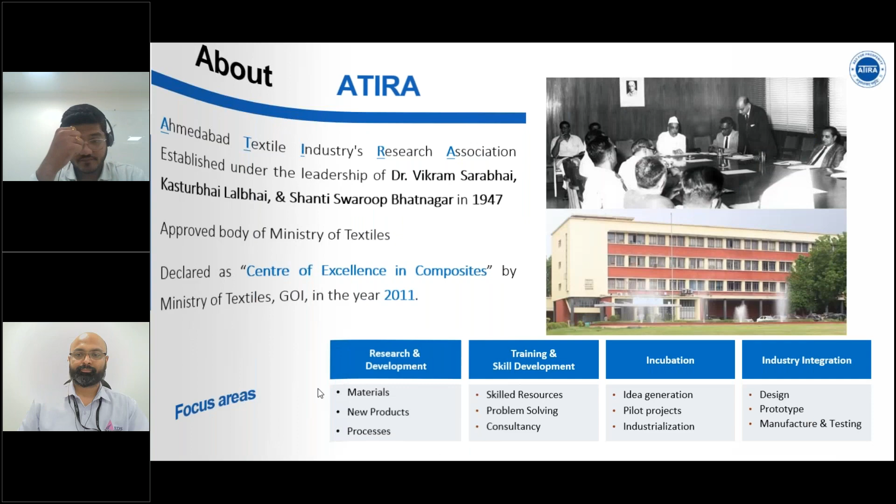So good afternoon to all, and welcome to all on this webinar on the design and simulation for the composite industries. So first, I'm just starting from here.

So basically, ATIRA, Ahmedabad Textile Industry Research Association, was established in the year 1947 by Dr. Vikram Sarabhai, Kasturbhai Lalbhai, and Shanti Swaroop Bhatnagar. And we have been declared as a Center of Excellence for Composites in the year 2011 by the Ministry of Textiles. We are working in different domains and focus areas, where the R&D, research and development in the field of composites, skill development, incubation, and industry integration.

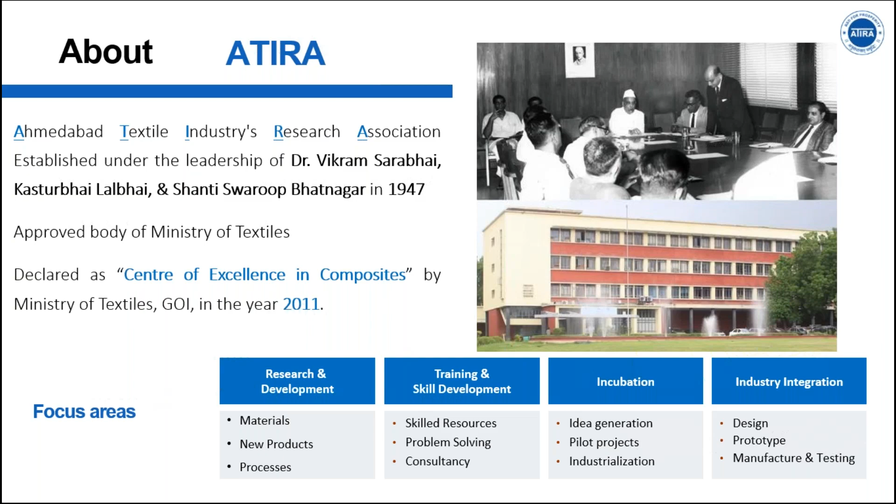Now our today's topic is focusing on composite materials, or the role of design and simulation in the composite industry. So, as you all know, what is the basic fundamental of composite? So when two materials which are distinct in physical property, or which are completely different properties, are combined, two or more materials making a single material, that will be considered as a composite material, where we are getting the combined property of these constituents.

There are so many examples of composites. Some of the common examples are already mentioned over here. Like fiber reinforced composite, ceramic composite, or the flesh in your leg reinforced with the bones, or like RCC structure. So these are the basic examples of composite materials.

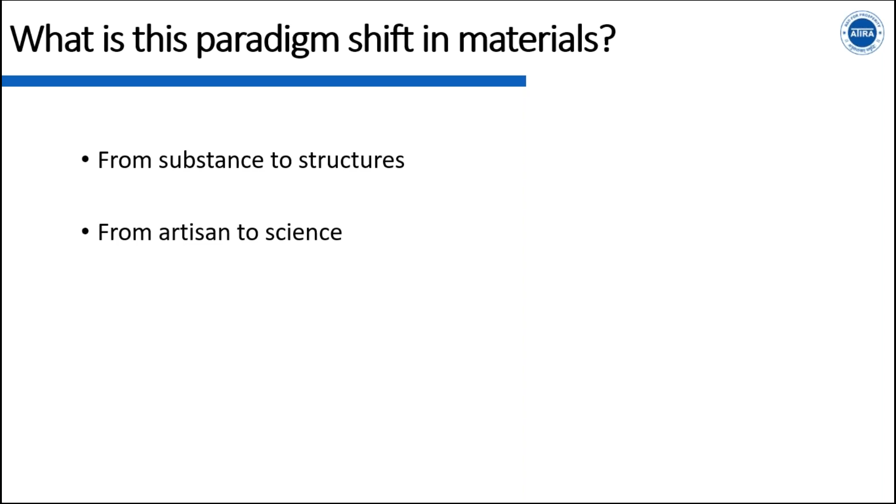Once we are talking about the design and simulation, there is something more important than any new application: the new material conception. The world is shifting towards a new paradigm about material, moving from substance to structure, from artisan to science, from workshop to mathematical modeling, where design and simulation play a wide role, and from what nature provided to what man can accomplish. These are the main parameters where composite material is shifting.

There are so many applications of composite material. Some of the common composite applications and segments are aerospace, transportation, wind energy, construction, pipe and tank, electrical and electronics, consumer goods, and marine. These are the major application areas where composite has been used instead of conventional material.

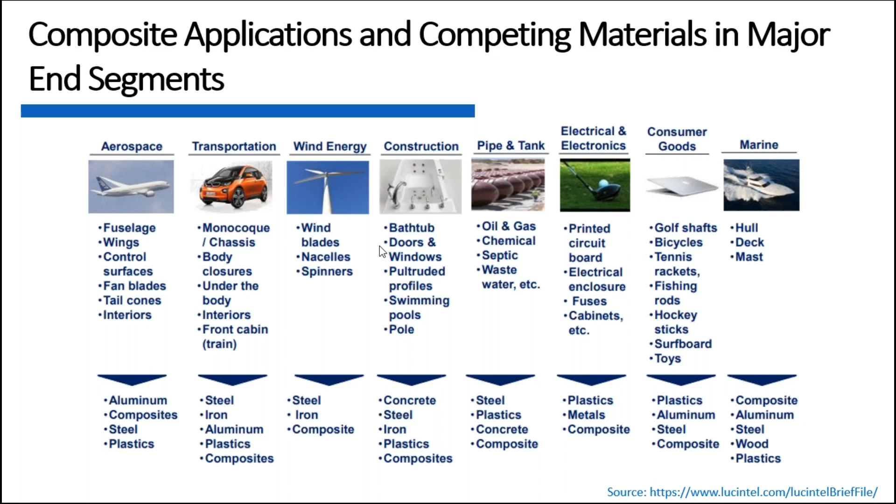The composite market in India is increasing, where new possibilities are there, and design and simulation play a pivotal role in the composite sector.

If we talk about common manufacturing processes, there are many composite manufacturing processes, but these are the very commonly used ones in industries: hand layup process, RTM, vacuum infusion, pultrusion, and compression molding. Subsequently, the benefit or which particular method can be used for development of composite material is mentioned.

Hand layup is suitable for large and complex shapes, and is low cost. RTM is suitable for medium to high volume production, having high fiber to resin ratio, especially for automotive or aerospace components.

Vacuum infusion is suitable for producing large or complex geometry, where we can also achieve high fiber volume, widely used for wind turbine blades, boat hulls, and automotive components. Pultrusion is for building and construction, and compression molding is for automotive components, structural components, and the electrical and electronics industries.

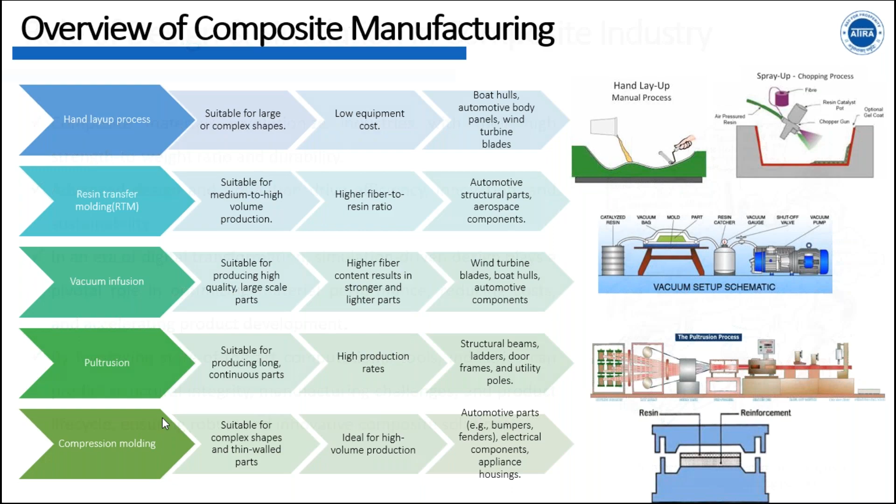Now, if we talk about the role of design and simulation in the composite industry, composite material is revolutionizing industry with their strength to weight ratio. In this era, as the world moves toward digitization, digital transformation and simulation-driven design play a pivotal role in optimizing material performance, reducing cost, and accelerating prototyping.

Ultimately, design and simulation helps select the right material and right manufacturing process in order to achieve the desired structural integrity of your component. By leveraging computational tools, industry can predict structural integrity, manufacturing challenges, and product life cycle, ensuring robust and innovative composite solutions.

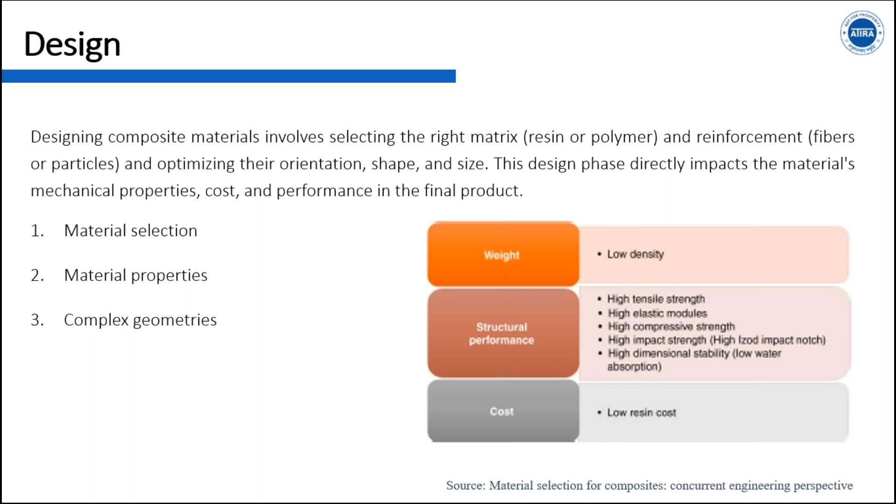So there are basically two areas: design can be separated and simulation can be separated out. Design is basically the selection of material, design of material properties, and design of complex geometry. Simulation means you can apply boundary conditions, apply the required conditions, and see how your material is behaving under such conditions.

There are different kinds of simulations. Mechanical simulation, where we are evaluating or predicting mechanical properties of the composite. Thermal, where you conduct thermal analysis on your material. Then material distribution simulation, where you see how fibers are aligning and how material flow takes place, which is more relevant to manufacturing simulation. With this you can also optimize the cost and time of your product development.

If I talk about composite material, which is completely heterogeneous and anisotropic, we need to predict or understand its properties: what kind of loading will be there and how the material will behave under those conditions. It's not possible to evaluate the material experimentally without manufacturing it and performing tests under actual conditions.

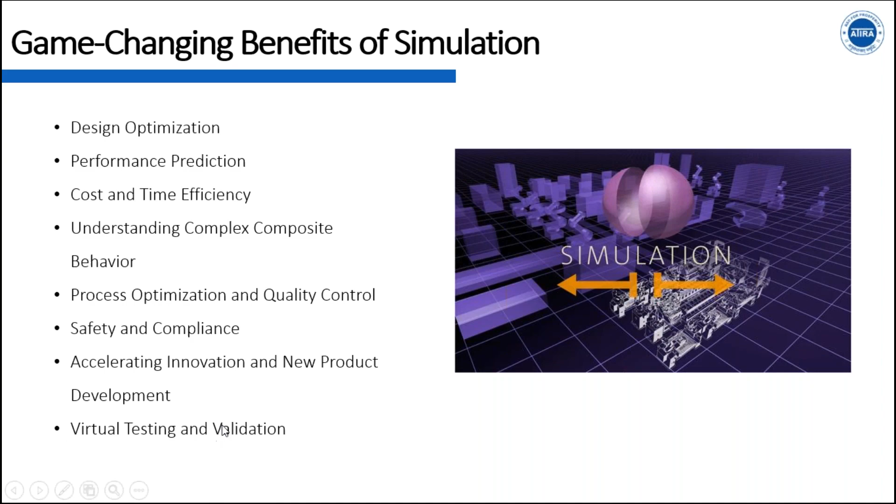Now ATIRA is also expanding its feasibility in design and simulation. Right now we are doing design and simulation for our tools and product design, and we are also serving the industry for such things.

Here I'm going to discuss some case studies of how design and simulation helps us predict the behavior of the material.

The first is related to erosion behavior. Erosion, for example in a wind turbine blade, is when sand particles strike over the surface, causing deterioration of the material.

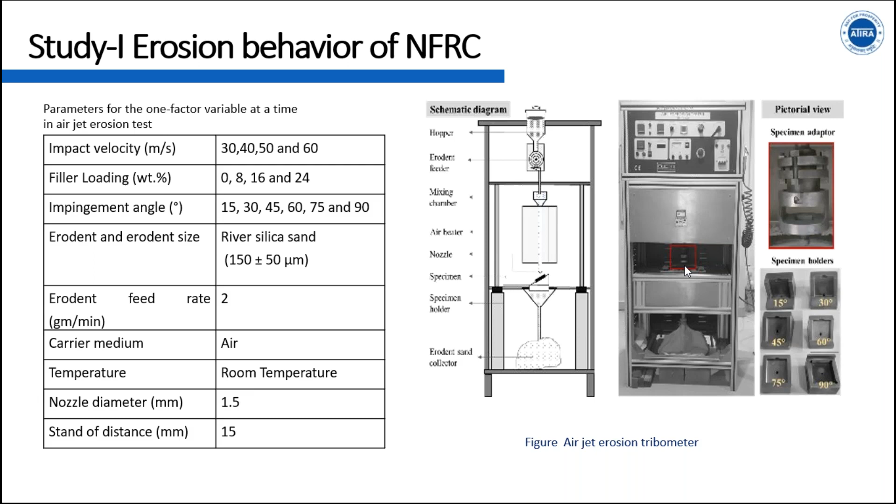First we need to create the geometry, then define the boundary conditions, then use certain failure modules — especially for erosion behavior, whatever failure models are available — and then we can visualize or predict the results.

The meshing is done according to how we want to predict and evaluate the results. Near the surface it's a fine mesh, then a bit more coarse, and the area near the nozzle — the less effective zone of the component or product — is considered more coarse in order to optimize the simulation time.

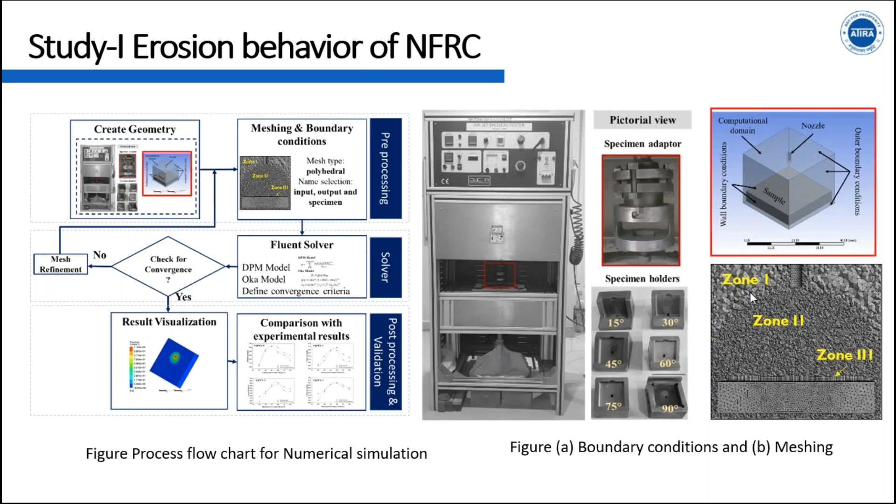In the actual condition, at a certain angle — let's say 45 degrees — if my particle stays over the surface, I get this kind of scar. This exact behavior we are able to simulate using the software, where we observe a similar kind of behavior, validating my model.

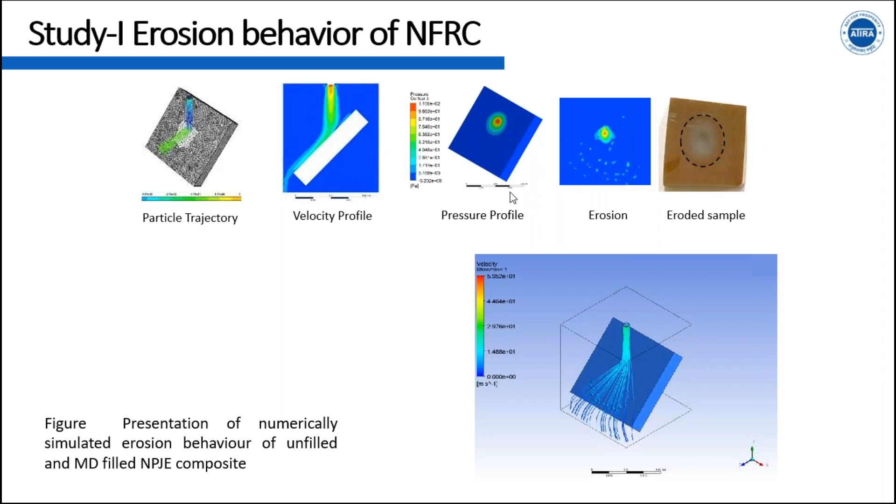Whatever the model has been developed is near to the experimental one, and in that way we can predict the actual behavior of my material, how it will behave, how much material removal rate will take place. For the different in-between angles, we considered 30-degree, 45-degree, 60-degree, 75-degree angles, and we are able to see the particle staying over the surface nearer to the scar, similar to what I'm getting in the experimental one. We compared the experimental data with the numerical simulated or predicted values, and I'm getting near about 98% accuracy of my model.

With the help of this simulation, the restriction in my experimental setup is that I can only measure erosion rate at defined angles like 15 degree, 30 degree, 45 degree. But in actual conditions, the impingement will not be at a specific angle. By having this kind of model, now I'm able to predict my erosion behavior at intermediate angles also. So for example, if I want to measure prediction at 20 degree, I can directly predict how much mass will be removed from the material and what kind of failure erosion mechanism will be there. So all those parameters I can now evaluate using this.

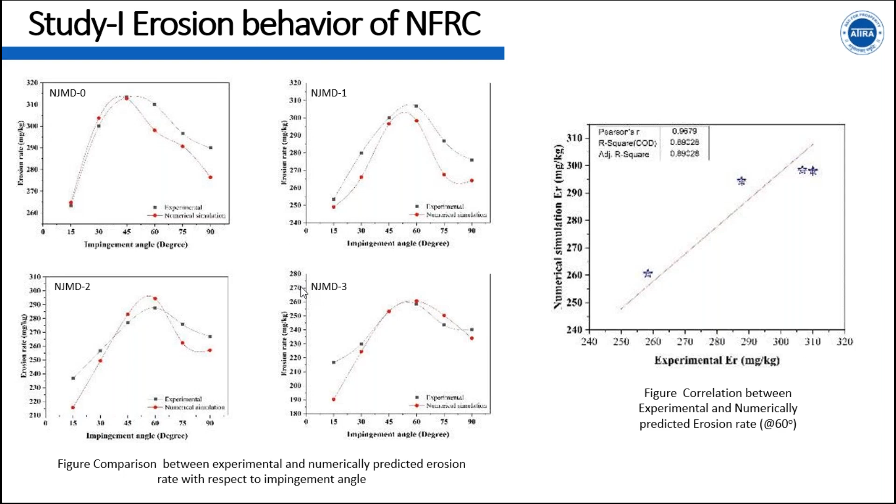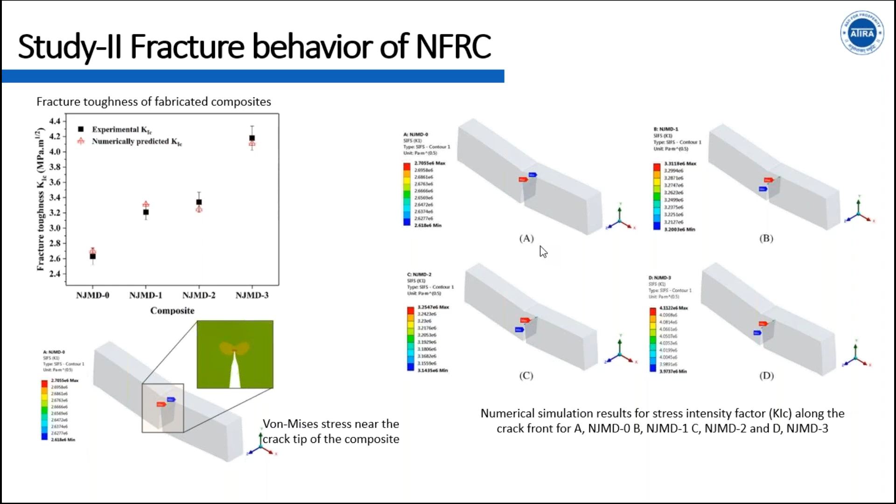Similarly, in the second case study, we considered natural fiber composite, where we predicted the fracture behavior of the composite. Here the 3-point bending SENB failure mode has been considered, and this shows the process flow and the boundary conditions. This is the meshing near the crack - we have to define fine meshing near the crack, or the point of concentration, and coarse meshing where the actual failure will not take place. We measured the simulated results and compared with experimental, and got almost similar results with slight deviation from the actual one because of certain constraints, maybe some noise created during the experimental testing. So this has been observed.

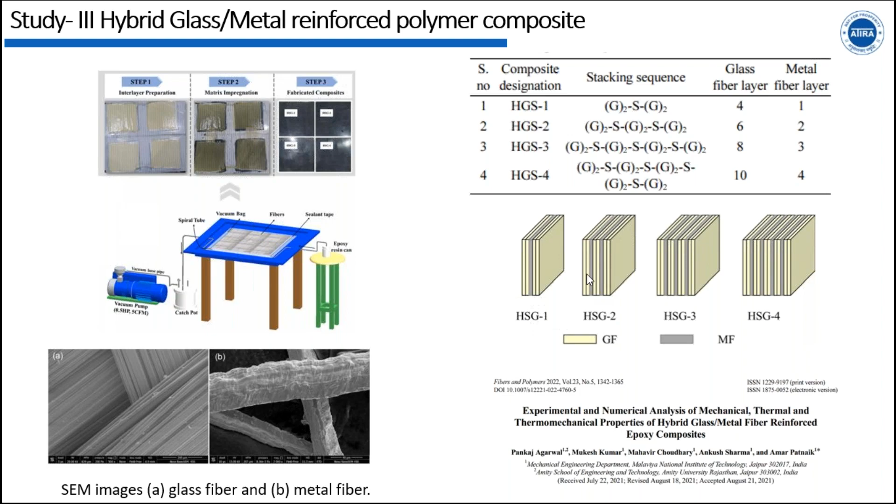In the third case study, related to hybrid composite, we developed the composite using vacuum injection process with different combinations considered, and we published one paper on that. Here we predict the mechanical property of the composite in order to see how my material will behave under mechanical loading. Whatever model has been created, we compared it with the experimental one, and we are able to see that whatever material behavior I'm getting in my experimental one, I'm able to simulate the same using this software tool and predict the properties.

So this kind of analysis is again helpful to predict the property of similar kind of material. I only need to change the material properties, and based upon that I can predict the mechanical performance of different materials.

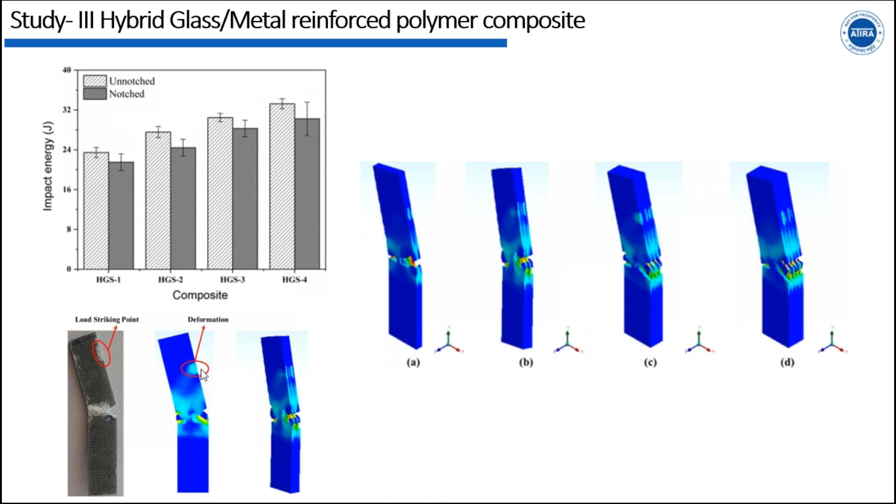Because in this component my tolerance is very low, so whatever composite I want to make, I need exact part dimensions with very low tolerance. So for that I need to select a proper material. In that way we have considered two different materials. The analysis has been done for more than two materials, but right now I'm just showing results for two materials. Based upon that, we are able to select the right material for the composite tooling.

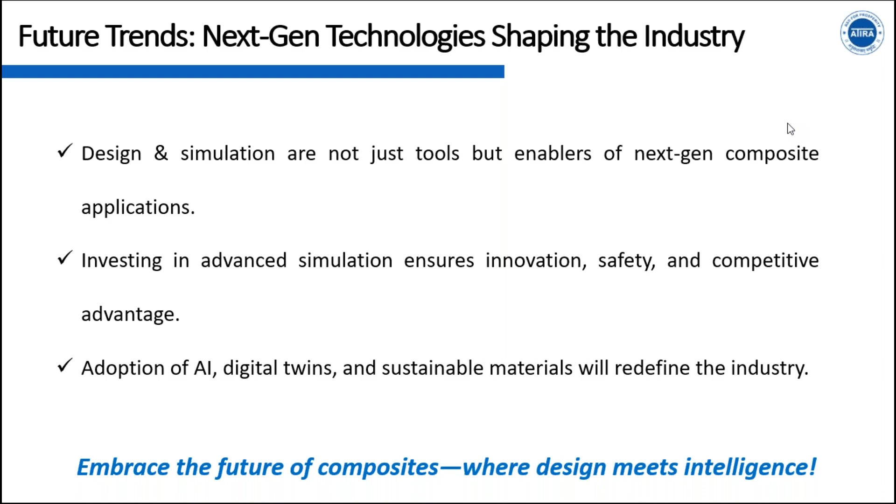We can do completely topology optimization, which is again helpful for generative design for ultra lightweight structures, and obviously for sustainable materials it will be helpful. So with that, design and simulation is not just a tool, but it enables the next generation composite industry, which is very much helpful for selection of the right tool, right material, right manufacturing process by optimizing cost and time. So this kind of tool is very much essential. With that, thank you.

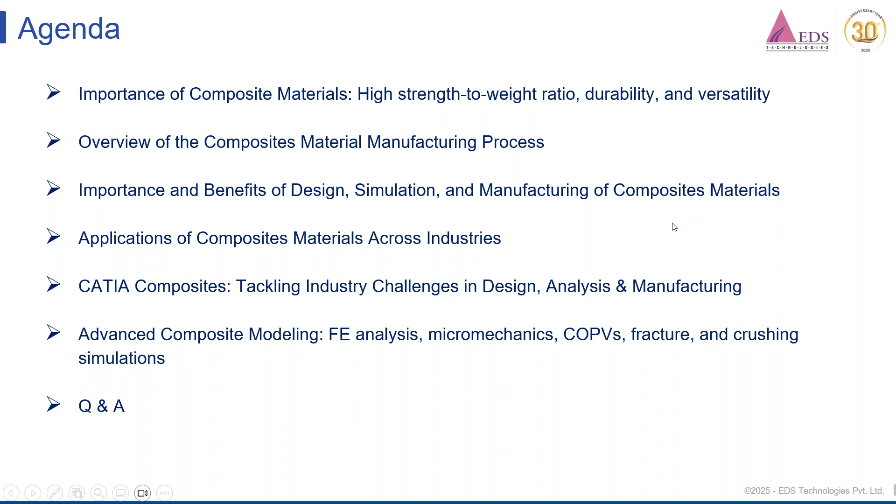So I'll be highlighting how composites have been used in the industry, and how we have been able to make use of these tools effectively, especially in the manufacturing sector. And also, like how the manufacturing sector has come out with different manufacturing techniques, starting from hand layup - today they have moved to laser projection systems. So this is how the industry has been progressing effectively.

And today I'll take you through how the utilization in terms of application using CATIA Composites in my presentation.

Dr. Ankush Sharma has covered the important elements of composites, like how composite materials are helping industries in different sectors - be it transportation, mobility, aerospace, or even textile industry, and also marine and offshore, and many other applications. He has also taken you through some of those composites manufacturing processes, like vacuum process or pultrusion and so on. And then he has highlighted how simulation tools have been effectively used in their composites design, and how they are able to see the impacts of this design and simulation.

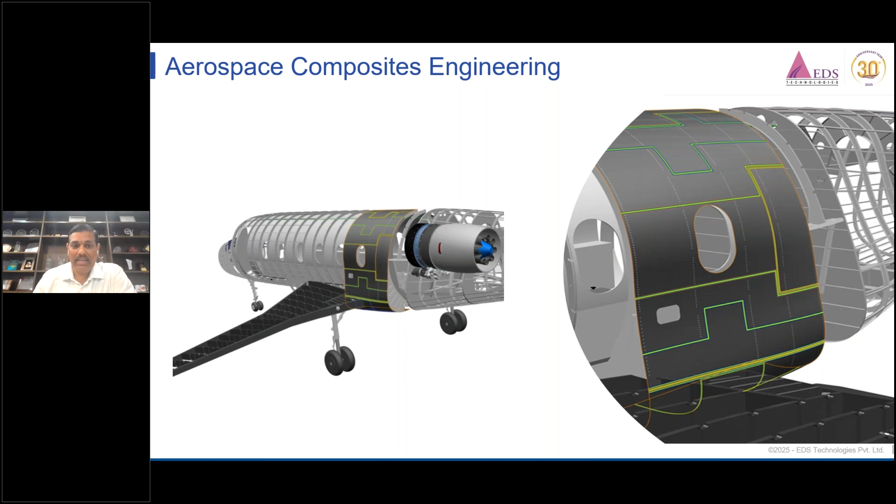If you look at aerospace composites, there are many business challenges, starting from preliminary design to detailed design, and then manufacturing preparation and manufacturing execution. We see lots of challenges. Users are looking for tools that work in a synchronized fashion.

You move from idea to concept to design to simulations, and then into manufacturing preparation and manufacturing execution. For that, we need a platform which will synchronize all aspects of composites and materials, and ensure that any changes you make, you are able to adapt quickly using these tools.

At the preliminary design stage, there could be complexity in terms of geometries, because the surface design has to take care of ply modeling and materials selection. You may choose different methodologies for designing the composites—it could be manual plies, zonal methodologies, or grid methodologies. So there are certain constraints from the design perspective.

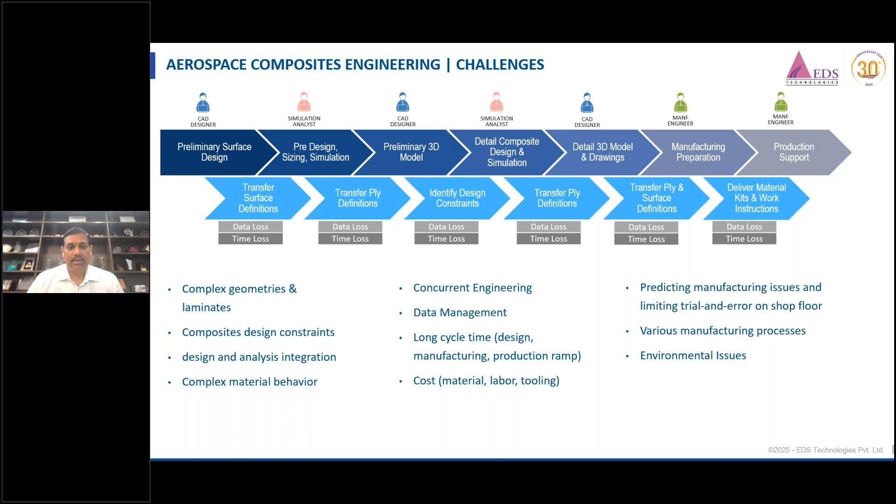So there are multiple challenges at multiple design phases, at the simulation phase, and at the manufacturing phase. We need to address all these challenges, and at the same time synchronize all these tools to effectively manage change. This is where Dassault Systèmes, with their 40 years of experience, have come out with tools that are very effective for the composites industry in particular.

I'll take you through an example of the fuselage, where the grid design methodology has been adopted, and how these materials have been applied layer by layer in terms of plies and laminates, and also the stacking sequence.

Then how the same preliminary design is carried forward to detailed design, where you do ply sectioning, numerical analysis, core sampling, and so on. Then you move on to the validation and testing phase.

In the validation and testing phase, you again encounter the challenges of fiber propagation behavior, and how you are able to predict these behaviors, and also see whether the ply area being laid up is done properly or not. That's where we look at the simulation tools, and then we enter into manufacturing.

We create the ply book, which is nothing but a number of drawing sheets. Each drawing sheet has a complete description about the ply material, ply orientation, ply direction, and the ply area and thickness. Everything is highlighted there.

I need to have hundreds of plies' information coming in the form of the plybook, and we also need to export this plybook in terms of DXF or DWG files, meant for the shop floor for easy reading and execution.

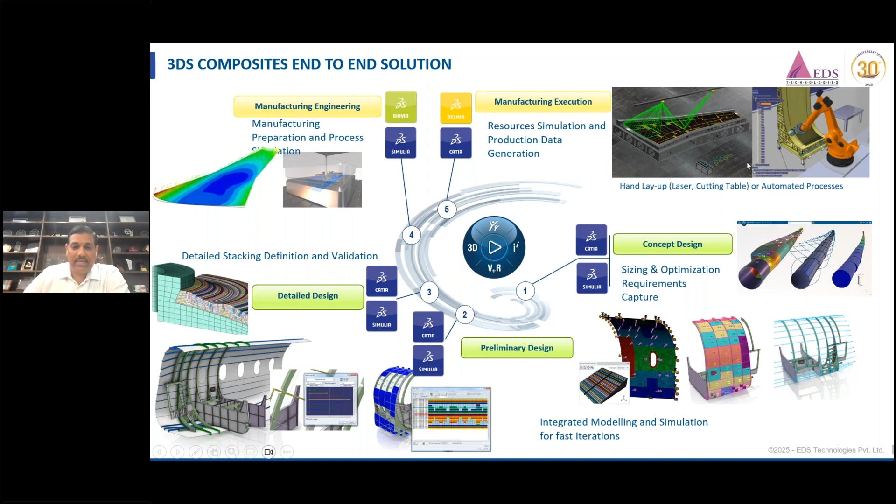So finally, you see the digital manufacturing, how this hand layup or laser projection systems are automated processes which will take these inputs to come out with the right composite component or assembly. So this is how the entire process has been captured in CATIA Composites effectively.

Initially, if you look here, we are having the complete ply information. We are using the grid design approach in CATIA to define the ply information, whether it is ply area, thickness, or orientation. It could be in terms of multiple angles, bidirectional, or unidirectional. Along with the orientation, we are defining the material, which could be aluminum, steel, carbon fiber, or Kevlar materials. We need to define those materials in this grid design approach.

Each grid has a number of set of plies along with their thickness, area, and orientation, along with the materials. Once I complete this grid design approach, I will be able to see the complete information of all the plies and the stacking sequence also in the CATIA design itself.

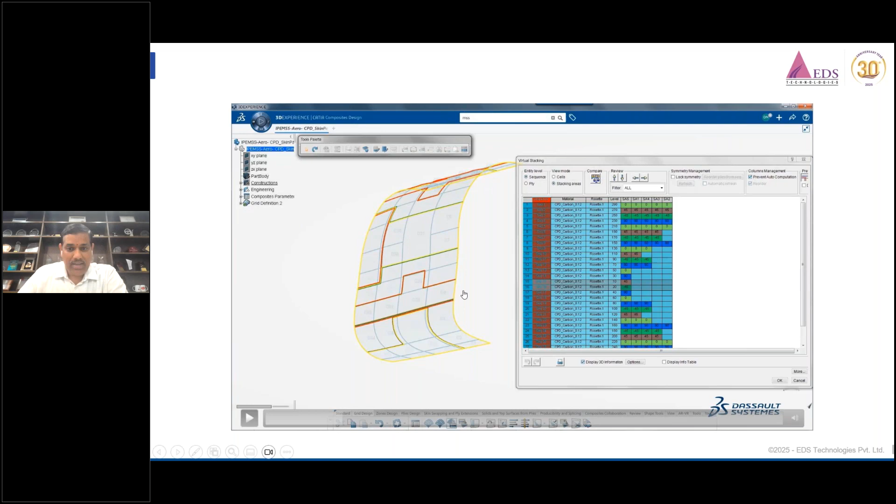So in this case, what you see on the screen is the complete numerical analysis sample having all the ply information coming in the form of an Excel sheet also. We can even export that into an Excel sheet and check.

In this example, we are seeing the fuselage portion, and first we are selecting the surface, creating the grid panel selection, creating the grid first. This grid is nothing but, in the xy directions, making discrete elements so that every discrete element will tell us what ply it has.

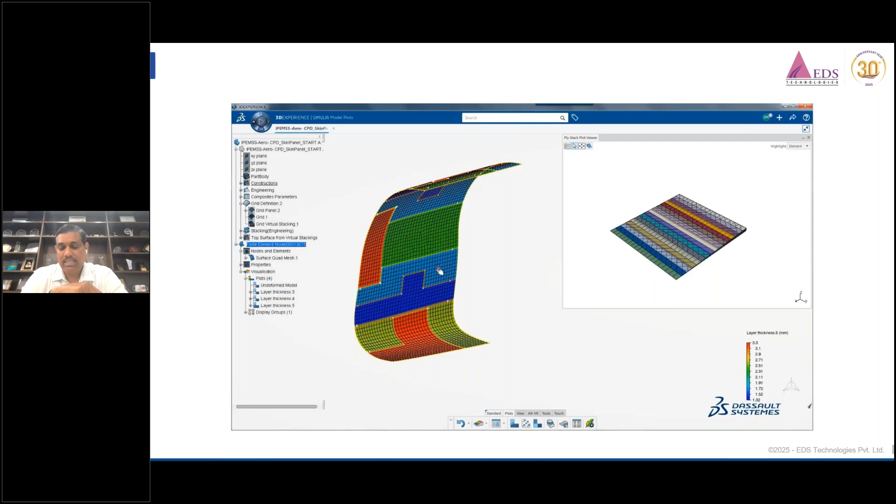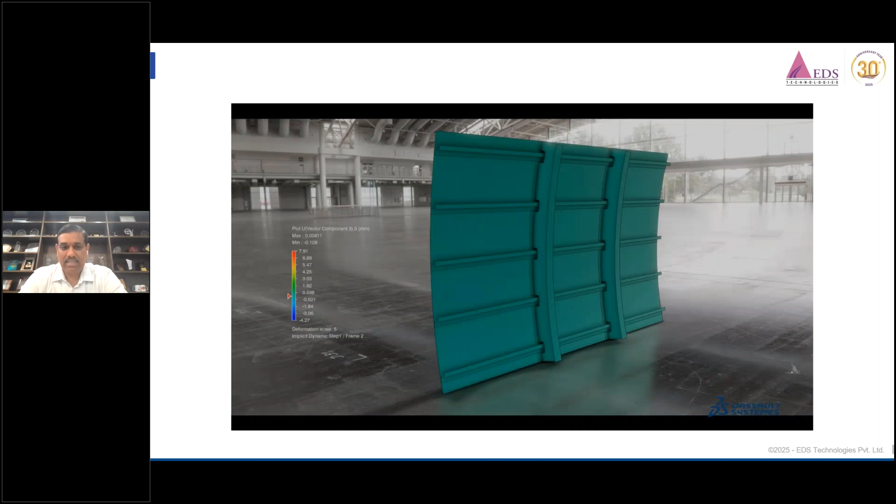Now this is another important element, what we call producibility analysis. This will highlight the fiber propagation behavior of a given component. You can see the moment you put the seed point over here, whether the fiber propagation is proper or not throughout.

So this is how this is going to impact, and by running through producibility analysis for each ply, we are able to predict whether the fiber propagation is proper or not, and whether the ply information is correct or not. We are able to do the manufacturability analysis here in this CATIA design itself. Once I complete this producibility analysis, then I can go for the manufacturing, export, and preparation.

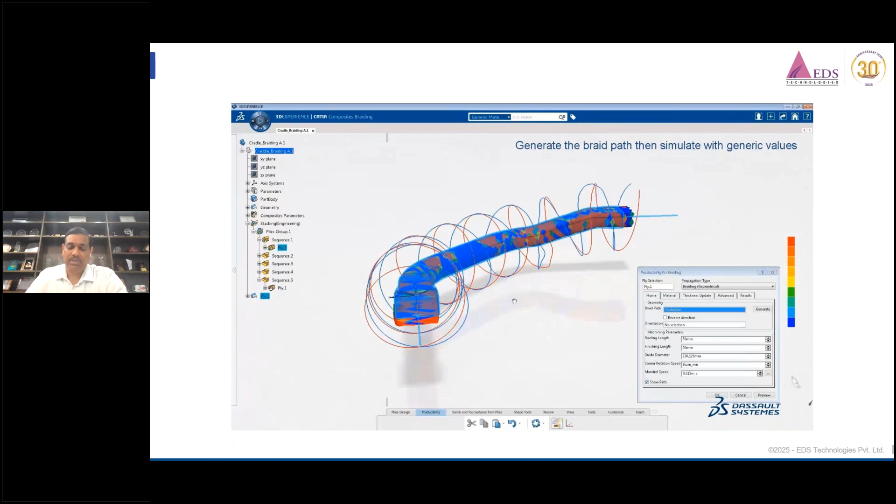There are multiple ways of looking into composites manufacturing. It could be hand layup, automated layup machines, compression molding, pultrusion, or many other ways of doing composites manufacturing.

Now, in this case, we are actually looking at the complete splice definition. We are going to come out with the isoparametric thickness model, which has got all the plies. Now, I have extracted all the plies and their areas from this particular design.

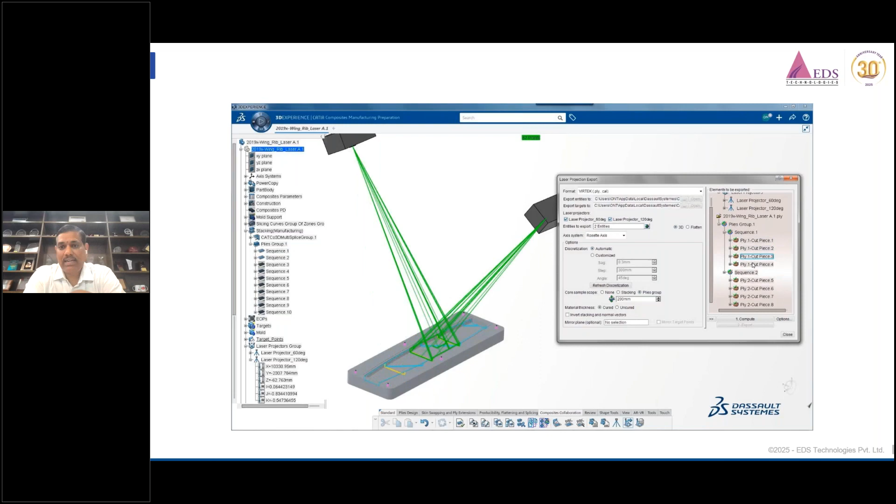Now, I can even connect with the laser projection systems, and we can see how the output is accurate or not. So this is how, right from design phase to simulation phase to manufacturing preparation and export, CATIA provides a complete solution for the aerospace industry.

We have several examples, like Airbus today uses CATIA Composites, Boeing, or it could be even Lockheed Martin, or many other players who are in the aerospace industry. They make use of CATIA Composites heavily.

So I will move on to another example from aerospace. Before that, what are the main advantages of using Dassault Systèmes composite solutions?

When I compare composites with metal, there are multiple benefits in terms of corrosion resistance or thermal resistance, high performance, low weight, durability, and also if you look at the unitized constructions of the composites, even the maintenance costs are also very much low compared to regular metals. So that is how you get the benefit in the aerospace industry today.

There could be many types of processes: wet hand layup, resin transfer molding technology, or vacuum assisted resin transfer molding, or it could be pultrusion, robotic preforming, filament winding, even braiding technology. We have separate roles meant for braiding technologies, tape laying, fiber placement.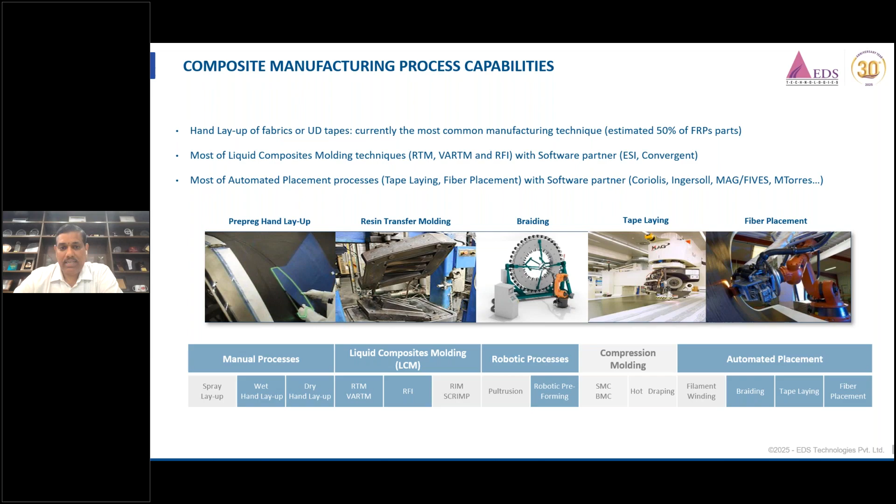So all these kinds of manufacturing processes are well addressed. The input that goes from CATIA Composites design to the manufacturing is almost seamless and 100% error free. So the inputs going from a composites design, irrespective of composite processes, is providing the industry a stable solution.

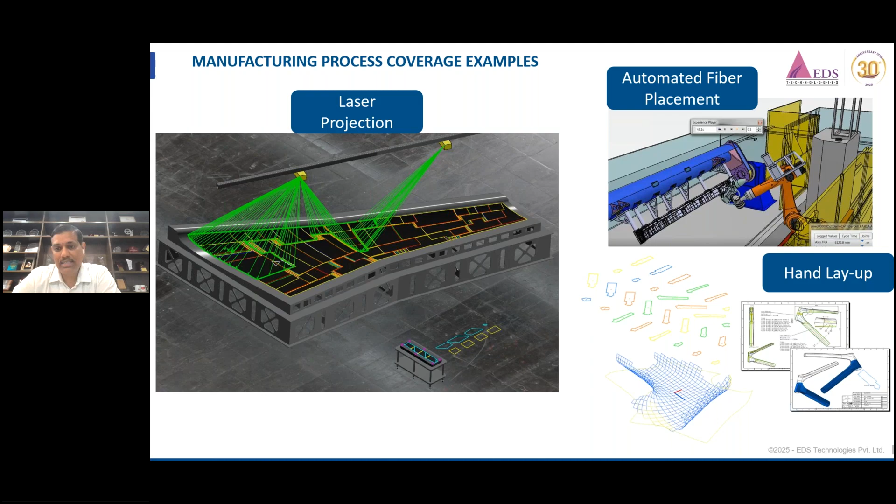So in this example, as I said, the ply sections that you see are getting generated automatically. These ply sections can be directly fed into the machines for nesting and cutting operations. That is how CATIA has been providing design and manufacturing, I can say. From the manufacturability perspective, we are looking into all possibilities even before it goes to the shop floor.

So I will move into wind turbine engineering. Basically, today you take any wind energy customers, they make use of these composites for wind turbine blades. So in this, we need to look at the benefits this particular solution can provide.

We need to look at the cost savings, optimize the product design, and look at how much power we can increase in terms of energy generation, electrical energy. So coming from the wind turbine blade, how to increase the energy generation from these wind turbine blades, that we need to look at. We also need to avoid the risks, because in case of wind turbine blades, the design should run without any interruptions and should be able to deliver the required power and energy.

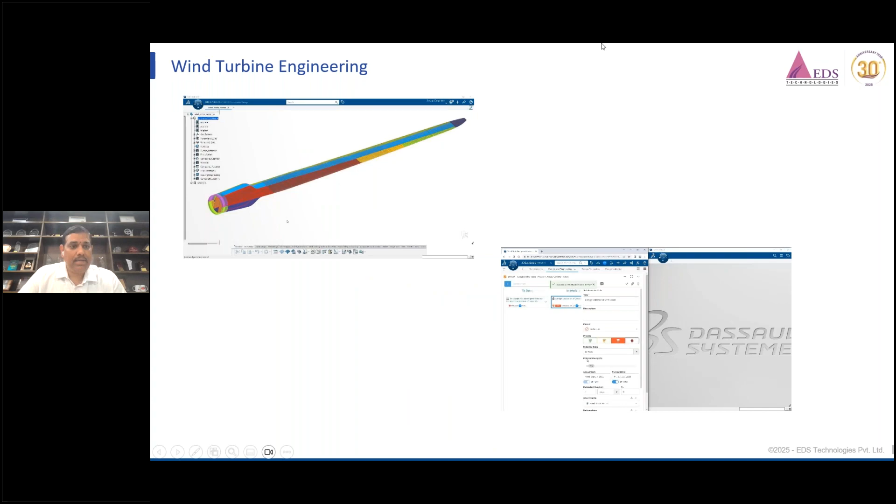I'll take an example of a simple wind turbine blade here, looking at the design aspect. This is an example of a wind turbine blade, how it is being designed. Here we need to look at the materials first, and then select the surfaces. Again, using the same grid approach, we should be able to define all the plies and ply sequences here, the laminates. You can see different types of plies and materials and their orientations - it could be plus or minus 45, 60, or 90, or any other angles.

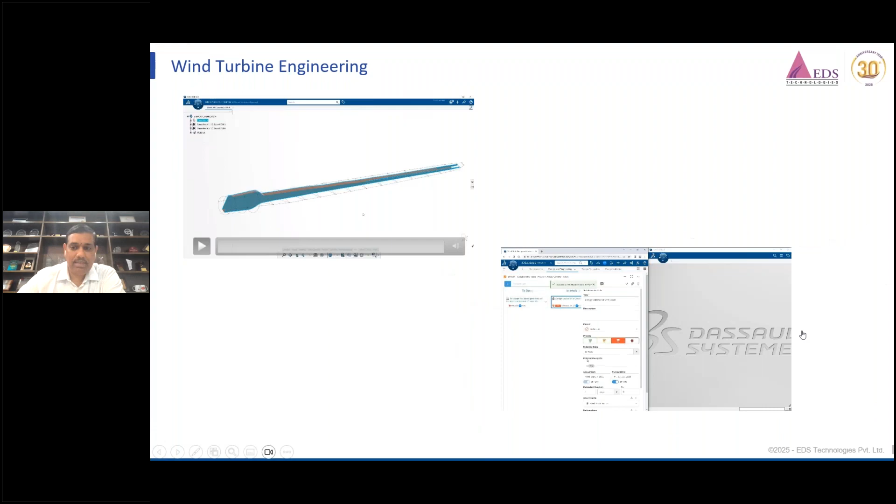So we need to again make use of the grid approach for more accurate predictions, and then we should be able to model this wind turbine blade in this way. So this is how the design is being made here, and then you can also run through the simulations. Looking at the simulation aspects, the pressure distribution and also the structural performance, we can predict the displacement and all that.

Now, using the 3D experience platform approach, we can seamlessly move from CATIA to simulations, design to simulations to manufacturing without leaving the screen. That is very, very important here. The user interface remains the same.

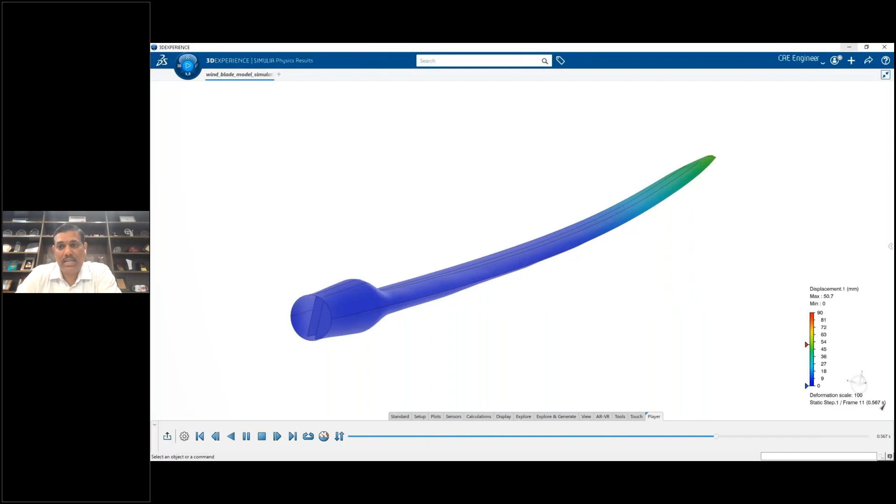We can see the complete ply modeling, ply sectioning, and also the complete thickness areas, and then represent the same in the simulation and run through this composite simulation approach. Here is a simple example in terms of displacement of a wind turbine blade, which has run through the simulation. Suppose if you make any changes in the design, automatically these things are reflected in the simulation workbench also, because the user interface is the same.

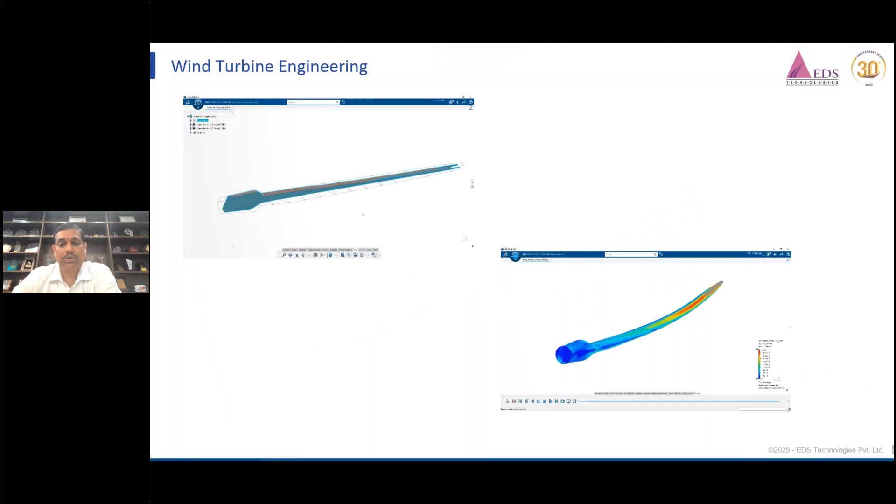So this is how the ModSim approach, we call it as modeling and simulation approach. This is going to help a lot in terms of the complete wind turbine blade engineering. So from the simulation perspective, yes, we need to look at all possibilities.

So again, here we have load calculations, extreme load cases, resonance analysis. We need to look at the structural noise, foundation design, multiple components, the hardware in loop. We need to look at the blade aerodynamics, the thermal cooling, and also the lightning strike simulations with respect to the wind turbine blade, and also antenna and radar system, basically with respect to electromagnetic radiations.

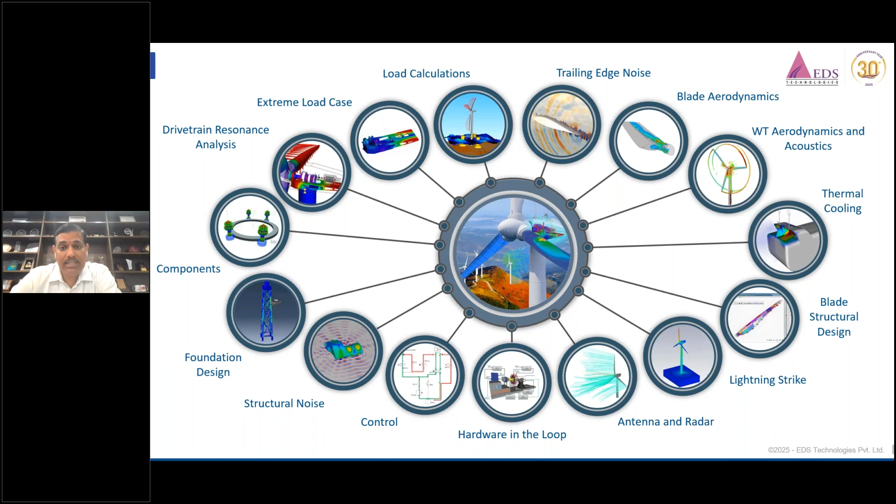So we need to cover all aspects of wind turbine engineering in terms of simulations, moving from design to simulation. So in this example, I'm just highlighting how the simulation can be done for a wind turbine blade.

As you can look into this wind turbine blade industry, we need to look at how to position these wind turbine blades in a specific location. We also need to look at the wind analysis, because it has to generate consistent electric power. So we need to look at the wind conditions, and we should be in a position to do the wind simulations as well.

So here, looking at this, we can cover all aspects of wind turbine blade simulation analysis using our tools, and then we are able to look at the rotor, and also how it is impacting.

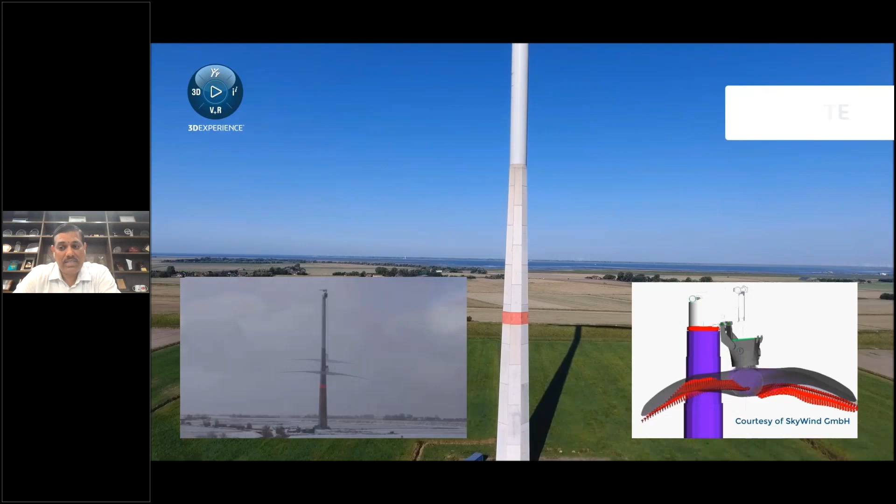We can see the real-time simulation with respect to wind conditions. We can also see the airflow around the wind turbine blade while it is moving. Here, the combination of mechanical, electrical, and also the sensor systems will come in.

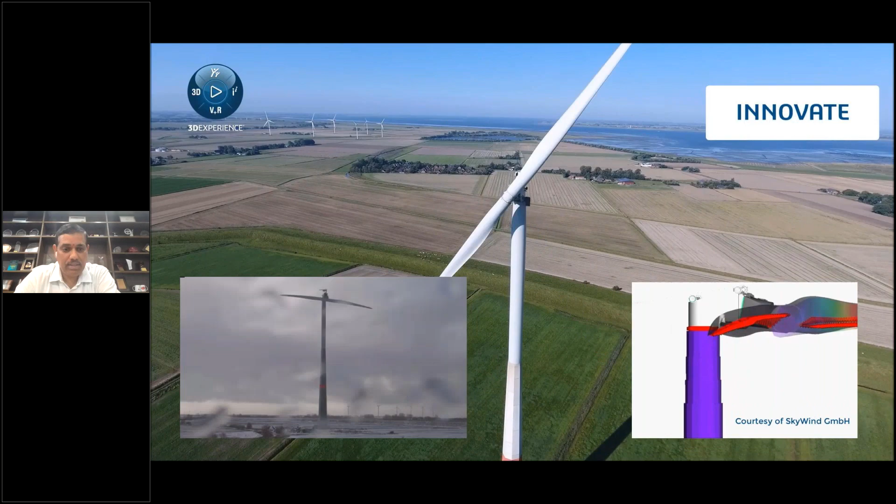So we need to look at what are the possible failures, and also how to avoid those failures upfront. This is where we can look at all the simulation from the overall systems perspective.

Again, the antenna and radar systems, we need to look at the electromagnetic radiations that generate, and also the noise and vibrations. We need to look at trailing edge losses, and also the noise calculations in terms of decibels. We should be able to accurately predict the overall system in terms of the real-time environment situation.

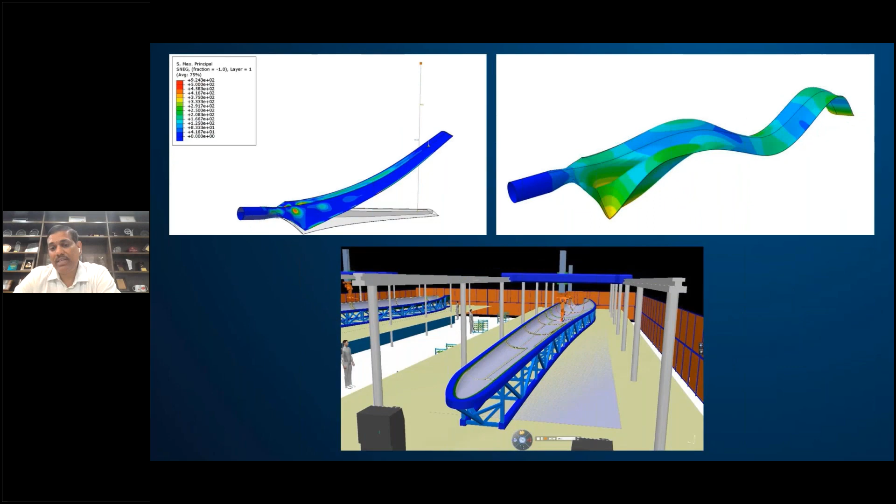So SIMULIA, along with CATIA from Dassault Systèmes, provides the complete solutions for this kind of simulations. And also the same design you can carry forward to the shop floor, and you can see the wind turbine blade manufacturing happening in the shop floor in this way.

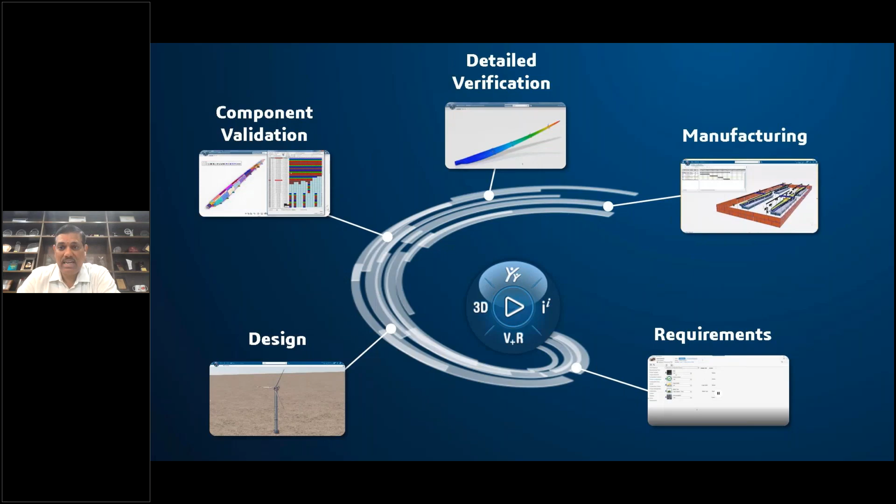So here we are doing the digital twin model of the complete wind turbine blade. We are creating the digital assets, and we are able to run from the design requirements to component validation to detail verification, and finally the manufacturing. So this is one example of a digital twin that I can highlight with respect to wind turbine engineering.

So today, most of the global customers make use of CATIA Composites, because traditionally they used to run in Excel sheets. Today, CATIA provides seamless support for Microsoft Excel sheets, wherein you can export the complete ply information through the Excel sheet, and you can also import them. It is a bidirectional associativity which we can provide using CATIA. That's why many wind turbine customers today prefer CATIA because of this seamless connectivity with other applications like Microsoft Excel.

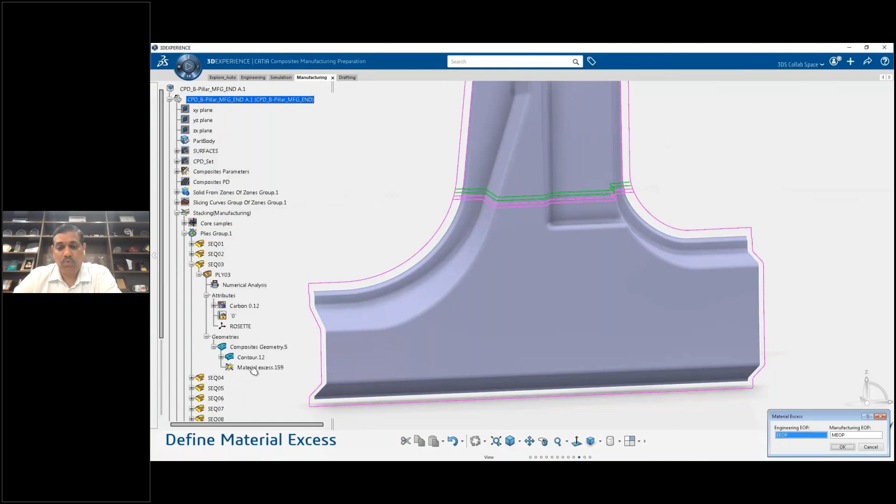So I'll take one simple example of A, B, and C pillars, which can be made of composites, because this is one important portion which upholds the entire body or chassis frame of the car. So we can look at this B pillar and how it can be made use of composite materials, because this is one which is providing the complete stiffness, durability, and strength. So this is an important part of the body in white design.

So we are taking care of the B pillar here. We are checking the producibility analysis and we are seeing the fiber propagation behavior using some of those advanced algorithms which are part of CATIA Composites. In this example, we are running through this producibility analysis, checking whether the fiber propagation is proper or not, and which are those areas where we may have to have cut pieces. We need to define all those cut pieces upfront by making use of this analysis.

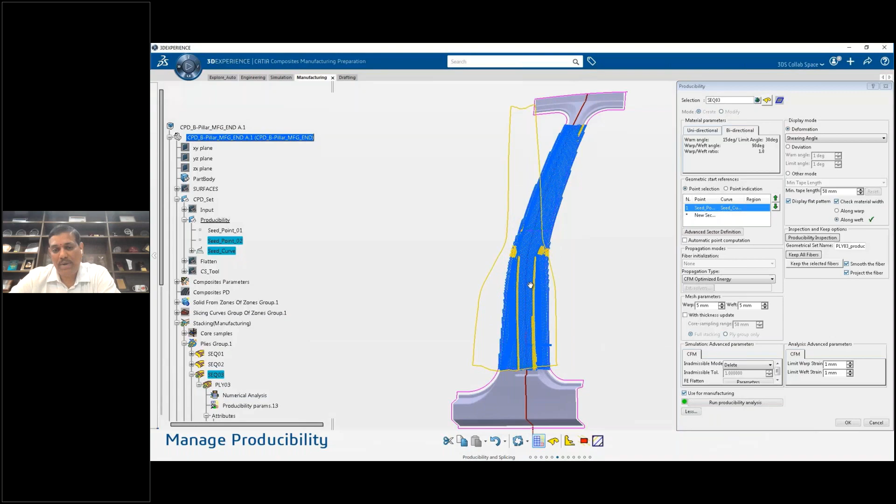Once you complete this producibility analysis, you can go for the plybook generation. We can check all kinds of ply shapes getting automatically generated. Once you complete that, you will see all the ply shapes coming in. You extract them into plybook, into drawing sheets, and then you are able to generate all those plies along with complete information - basically unfolded ply information, ply area, thickness, material direction, and also the sequence. Everything is highlighted and automatically generated from CATIA.

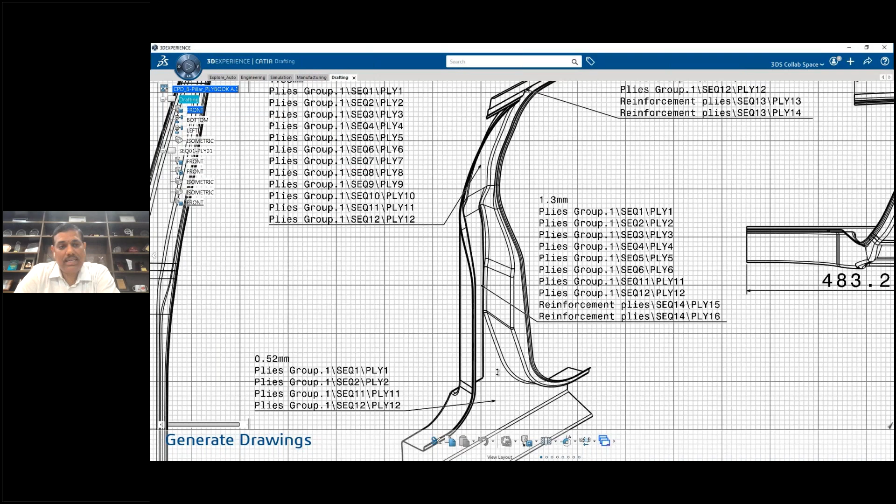Once we have this, we can provide this to the shop floor, and accordingly, either it is a hand layup or a machine layup, or it could be any other compression molding or pultrusion technique. Based on those techniques, we can provide the inputs from our end. So this is one example of automotive application that I would like to highlight here.

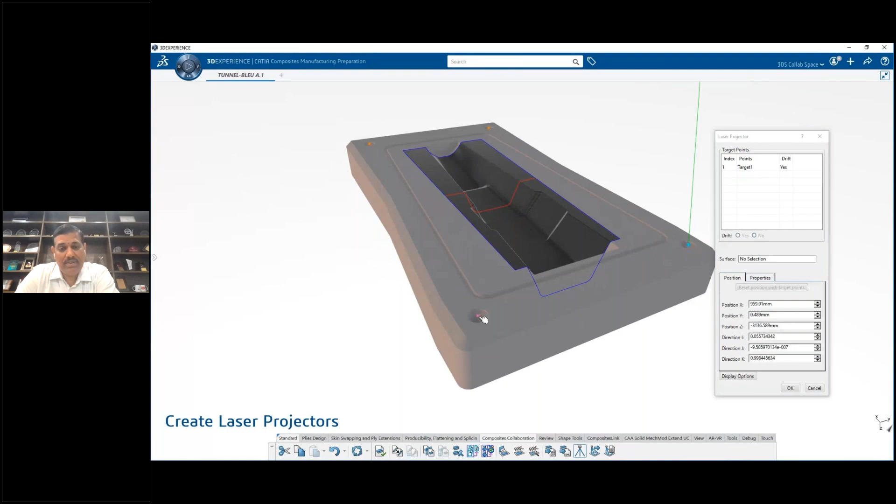In fact, the percentage of composites utilization, especially in the luxury car segment, has been increasing very consistently. So we can even feed our inputs also to the laser projection systems, checking out the accuracy of this particular manufacturing process, and we can actually run through this virtually, the laser projection systems virtually in CATIA itself. So this is like moving from design to simulation to manufacturing, and checking and validating at every step.

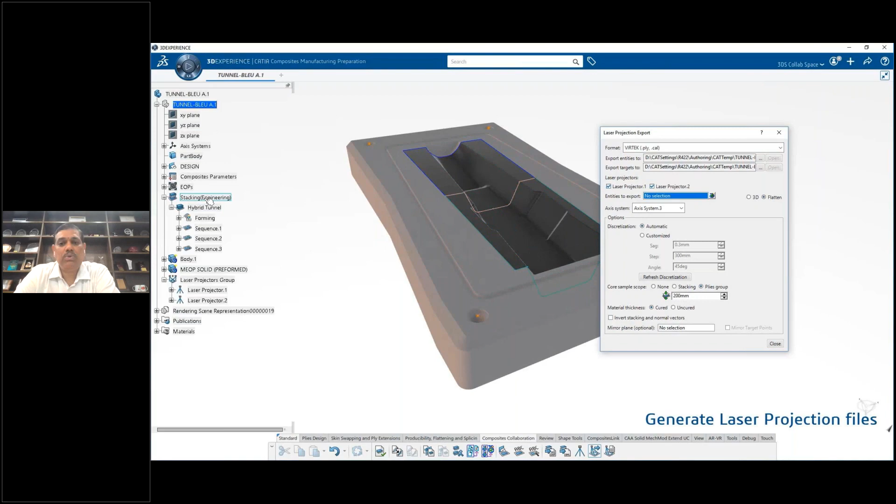We are able to see how seamlessly CATIA Composites or Dassault Systemes solutions have been helping. Here we can even choose multiple types of formats which will go as a direct feed to the machines - whether it is compression molding, or laser projection systems, or braiding or pultrusion, or whichever the manufacturing process, we are able to provide the right inputs from our tools. So today customers are looking for complete synchronization between all the aspects of composites - conceptual design, detail design, simulation, and also manufacturing preparation and export.

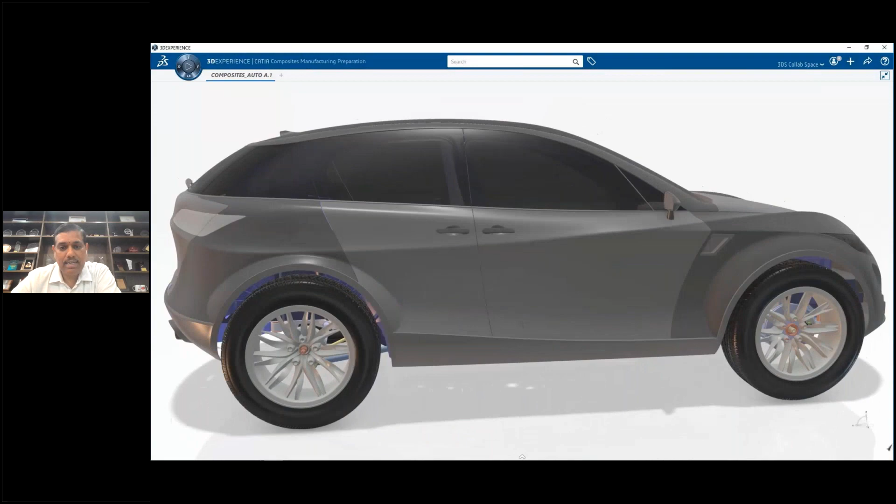So this is what we can do using Dassault Systemes solutions in the composites domain. We have several customers in India who are using this, and you are able to see the benefits. We have many Airbus suppliers, customers like Expleo or Infosys, and also Capgemini. There are several customers like Umlaut, and of course we also have direct customers like Airbus Center of Excellence, Boeing Center of Excellence. They make use of composites heavily, and we support them.

We also provide all the composites relevant trainings as well. The main advantage of composites is that when you are using the systems tools, you are able to design, validate, manage, and optimize all the complex production-ready composite parts, and you can reduce the design time to market. You can also optimize the performance and weight by designing in the context of analysis.

And also you can do lightweight engineering. You can also do topology optimizations using the same tools, and you can minimize the development cost and also prototyping, avoiding the trial and error methods, because traditionally we have been using hand layup in a traditional way with a kind of trial and error approach. We can eliminate all that using these simulation design and simulation tools.

And also we are providing the advanced fiber modeling and simulations, basically AFM simulations for the producibility analysis. This is one of those most important characteristics, because if we are able to predict the exact fiber propagation behavior, then we can deal with any kind of issues that can come up later in the shop floor. So we are able to predict them in advance through virtual tools, and we are able to provide the right inputs to the shop floor.

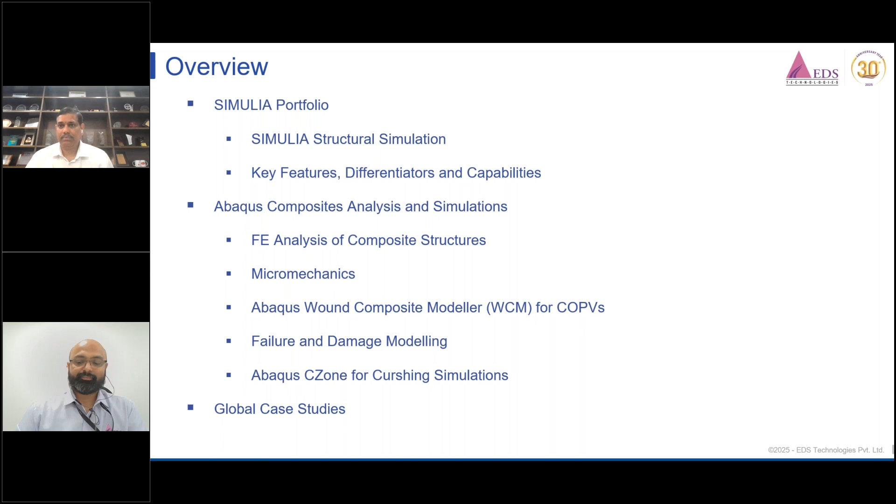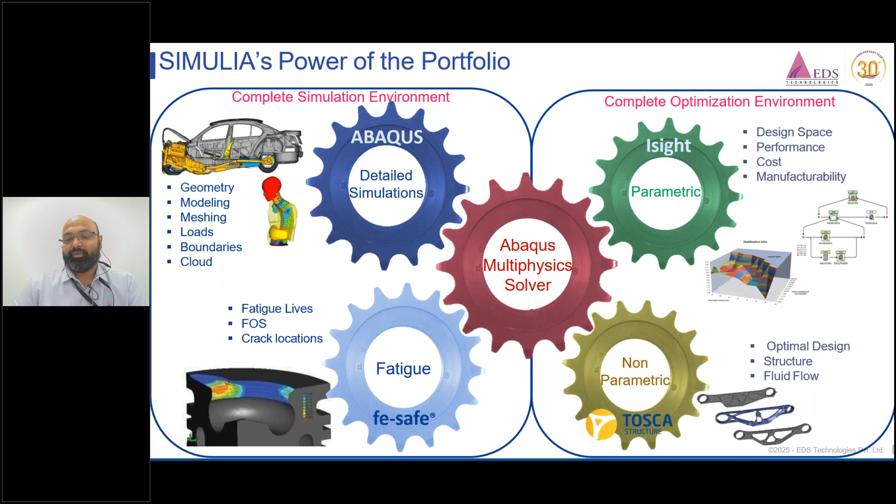In Abaqus, it deals with geometric modeling, meshing, defining loads, boundary conditions, etc. In fe-safe, we have fatigue life estimation, factor of safety, and identification of different critical zones in any structural component. Then we have Isight, our parametric optimization tool, and another non-parametric optimization tool that we have is Tosca.

Coming to Abaqus structural simulation, it is basically the world's leading simulation suite for finite element methods. We have realistic simulations for finite element as well as multi-physics problems. It also offers a complete solution for a wide spectrum of industrial applications, be it transportation, mobility, aerospace, engineering, defense, consumer products, etc. It is able to handle very complex materials, assemblies, different sorts of contacts, and problems such as failure, fracture, fatigue, durability, etc. It is based on a very high performing architecture, and with the help of these capabilities we can have a very rapid turnaround for simulation solutions.

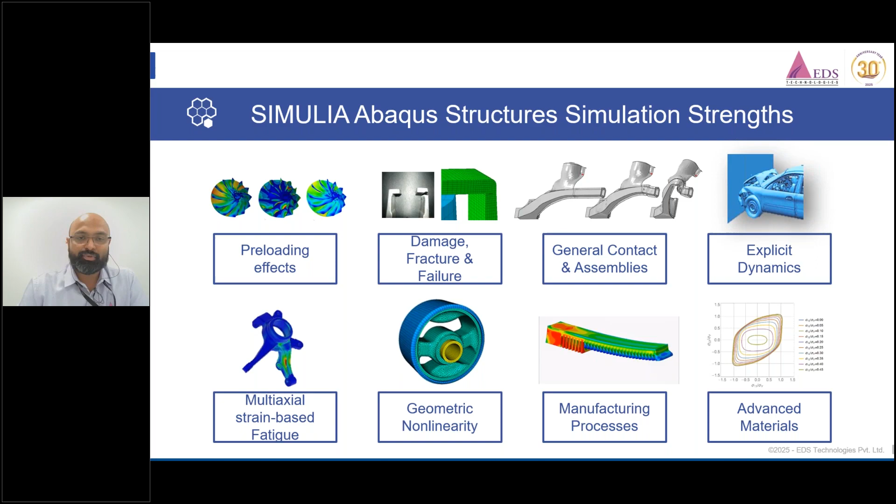What are the key differentiators of this Abaqus solution is that it can handle various multiphysics problems in linear and nonlinear regimes. We can also perform coupled physics problems like structural acoustic, thermal electrical, thermomechanical, etc. Also, we can perform electromagnetics and SPH methods of simulation. As we just discussed, we can model and simulate very complex materials like rubbers, thermoplastics, and some biomedical materials like tissues, etc. Also, a key aspect is the ability of this solution to correctly model, analyze, and simulate composite structures.

We can prepare the model and perform the analysis to interpret the result in a very automated manner, and we can also customize the workflow that we work with. Also, we can have flexible MBD simulations and complex assemblies like the joints in any biomedical simulation or control parameters for any dynamical problems, etc.

Also, we have a very robust contact, failure, fracture algorithm and solution in this package. As we have discussed, we can perform high performing computations with very little effort, and we can perform very large scale analysis as well.

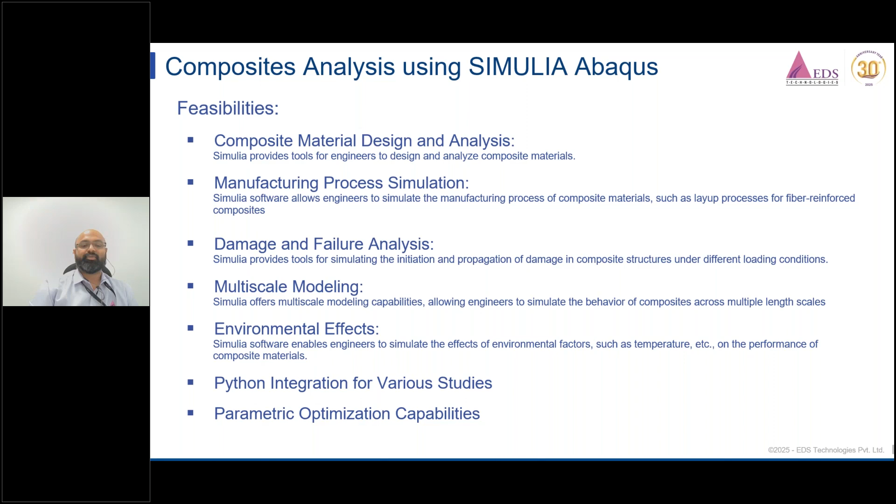Now coming to what different modules and different analysis could be performed. Coming to the basic composite simulation, as previous speakers have pointed out, in case of laminated composites, we need to define each and every lamina property individually, and the stacking sequence and individual constituents at macro, micro and meso level will affect the overall composite behavior at macro scale.

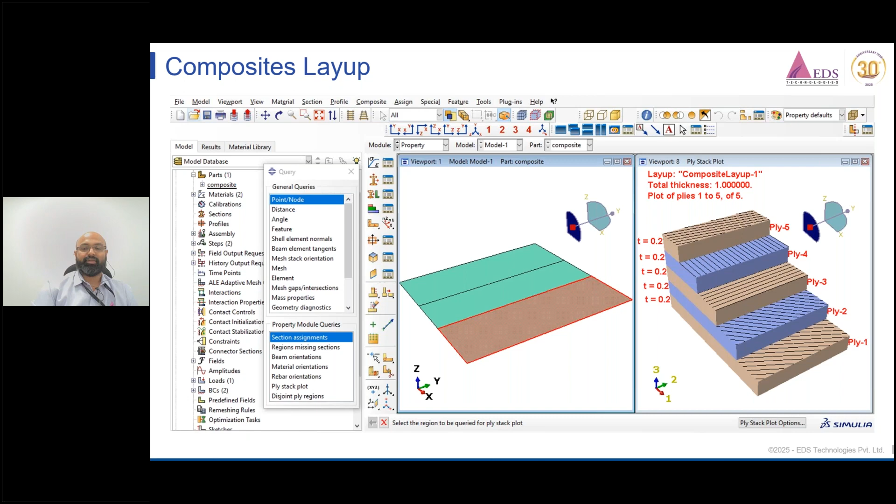So this is how we can define the individual ply level properties for the composite construction. When the composite layup for a laminated composite is defined, this is how the workflow in the Abaqus environment looks like. Here we can define the layup of the individual lamina, and we can define all the properties required to perform the structural analysis. Also, we can control how the ply stacking thicknesses and different angles contribute to the microscopic design.

Now coming to the micromechanics aspect, we can define the random orientations of short fiber composites, inclusive of embedded fibers at micro scales, and we can also perform the upscaling and downscaling multi-scale approach. We can use it to perform various analysis right from micro scale to mesoscale to macro scale.

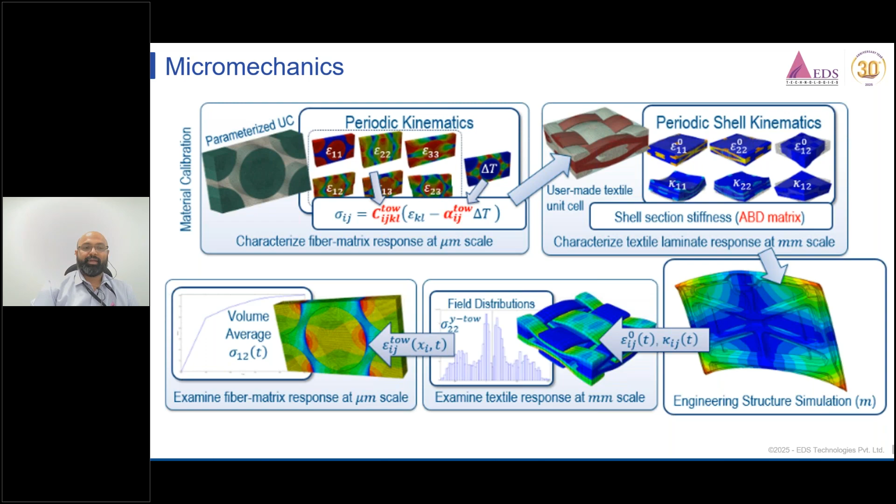In terms of textile composite laminate, we can perform periodic RVE analysis, and we can also make use of symmetric boundary conditions, periodic boundary conditions, to evaluate the individual stiffness matrices. These characteristics or constitutive properties will then be used for further structural simulation, and also at the macroscopic response level of the composite, we can evaluate the simulation risk.

Now coming to another module, the wound composite modeler. It is basically used to design, model, and simulate composite overwrap pressure vessels, so COPVs we can model and analyze in this.

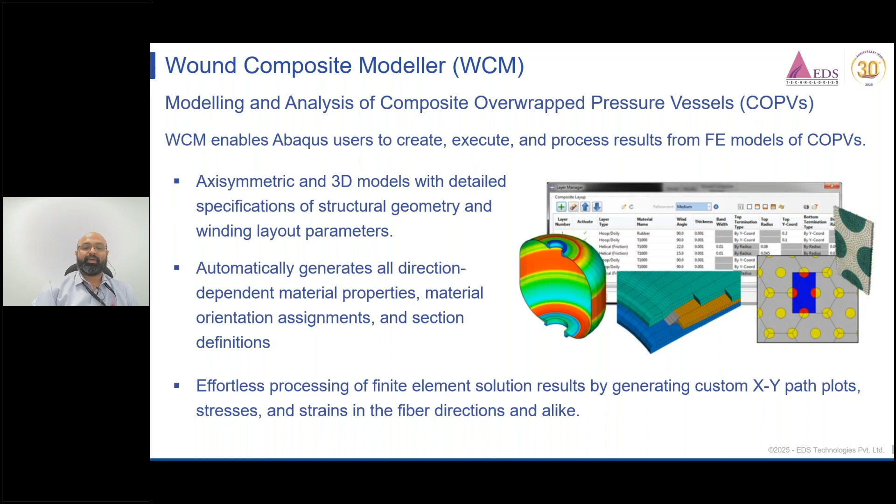So we can define various axisymmetric and 3D models with geometric and winding parameter specification. You can also automatically generate direction dependent material properties, orientations, etc., with the help of the homogenization tool available with this module. Also, it is very easy to perform the finite element simulation, and we can generate various post-processing data for various fiber directions, winding sequences, and materials, etc.

Now coming to how the workflow will look like. So here we have the layer manager for this WCM modeler, and we will define various wrapping layers for this pressure vessel designing. As we discussed earlier, it will use the micromechanics at micro scale.

We can define the individual constituent properties for the ply level layer generation, which will then be used for the structural analysis at macro scales. Here we can see that the meshing for various types of materials and layers are color coded to identify different materials and different element sizes for the various layers inside the pressure vessels.

As Dr. Sharma explained in detail how difficult it is to model accurately the failure and damage in case of composite materials, here in Abaqus we have various failure criteria available for composite materials. These include the popular Hashin failure criteria, which defines the fiber tension and fiber compression criteria, as well as matrix tension, matrix compression, and shear failure criteria. We also have Puck's failure, Tsai-Wu, Tsai-Hill, and maximum stress and maximum strain criteria.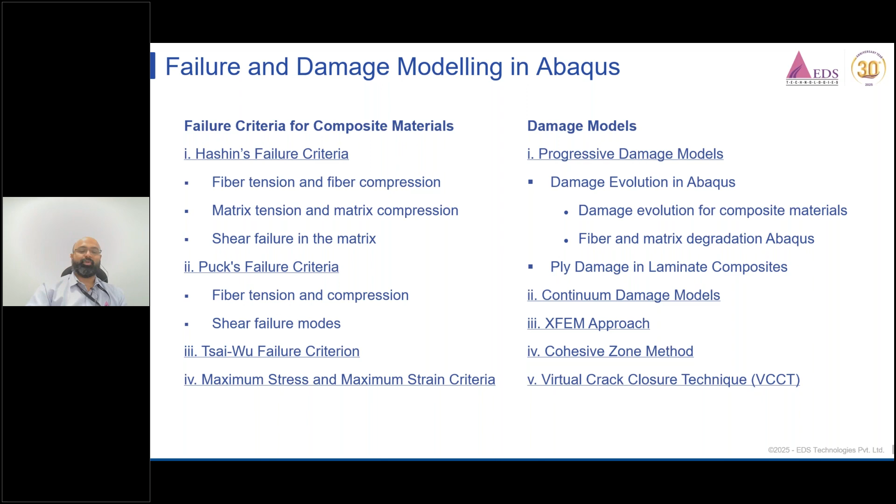Another module we are going to see is CZone, the crushing zone analysis for Abaqus. It is an add-on capability, and the simulations are run explicitly to predict material crush behavior, including the direction of implementation of the crush for the failure. We can calibrate using coupon tests and include that data for the macroscopic and overall heuristic simulation approach for composite crushing.

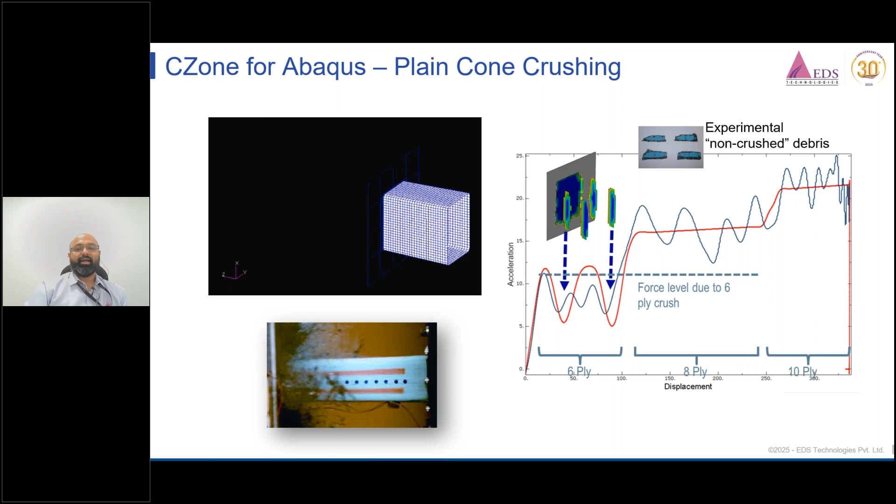This is one typical example of how CZone crushing works in Abaqus. At the bottom of the screen, the experimental setup shows the crushing of a plain composite cone, tested against the animation showing the Abaqus simulation. On the right, the curve compares experimental versus numerical solution, and we can see it has very good agreement with the experimental data.

Now, just to brief everything and showcase the capabilities, I will present some global case studies which our customers from the Dassault solutions have been doing with the help of Abaqus composite simulation.

Now coming to aircraft analysis: this is a cross section of an aircraft wing, and we can perform structural simulation of this wing to define all the different geometrical conditions, boundary conditions, and material orientations of the fiber composite constituents. We can prepare an assembled model of all individual spars, ribs, stringers, and skin together, and subject this assembly to given loading conditions - static, dynamic, gravity, all sorts of loading scenarios - giving us the overall estimation of how the structural simulation works in Abaqus.

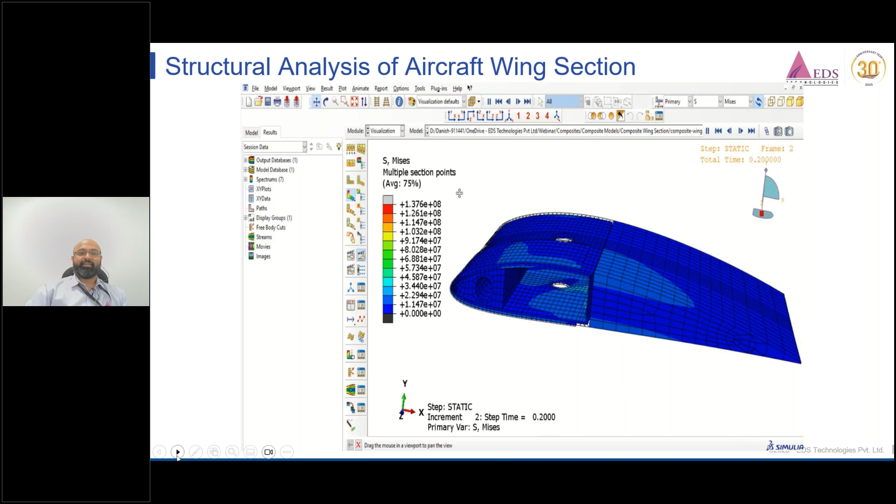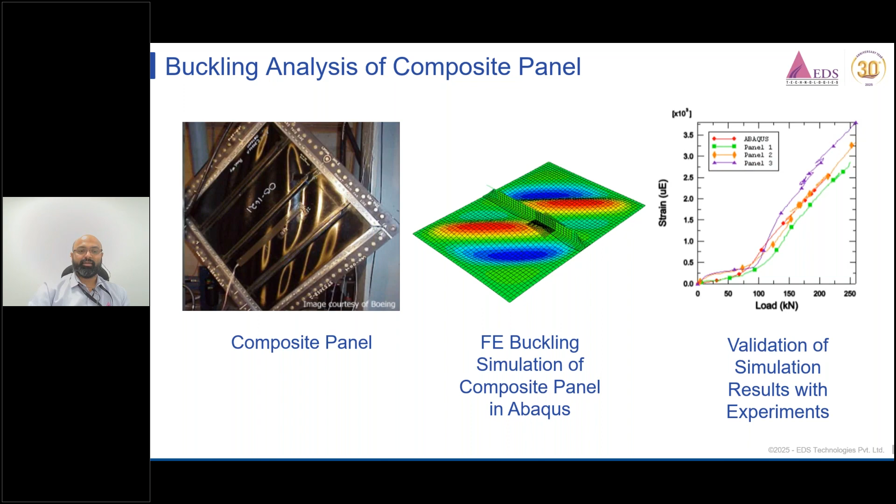We can also perform various buckling analyses of composite structures. This is a typical example of a composite panel subjected to buckling loads, with some buckling modes compared against experimental data. As you can see from the comparison, the Abaqus results match excellently with the experimental estimation of the buckling characteristics for the composite panel.

We can also perform various wind turbine blade simulations, as my previous speaker Mr. Srikumar explained how Dassault solutions are helping the wind turbine sector and manufacturers perform these sorts of simulations on a virtual platform. Abaqus offers similar capabilities in terms of structural simulation as well as fluid-structure interaction of wind turbine blades.

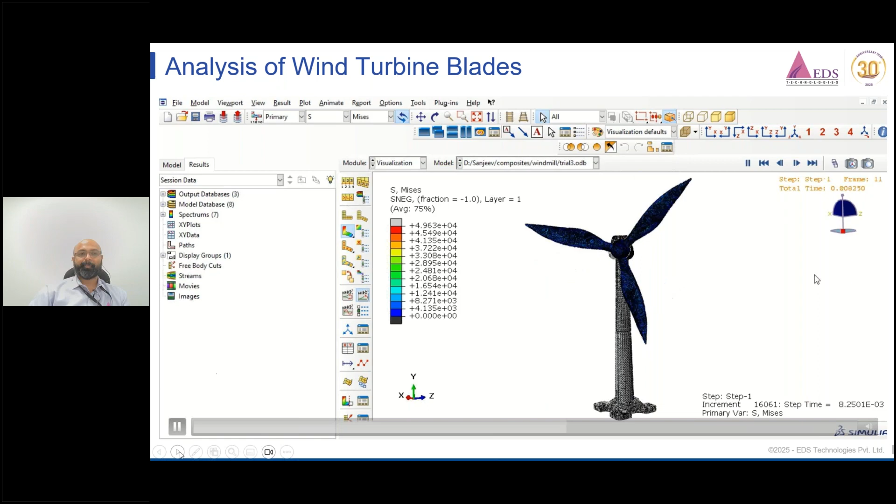Now coming to pressure vessel analysis - these are some cases we have showcased here. The approach works such that for a given material, for a given fiber and matrix composition, we can perform micromechanical homogenization to generate the layer properties.

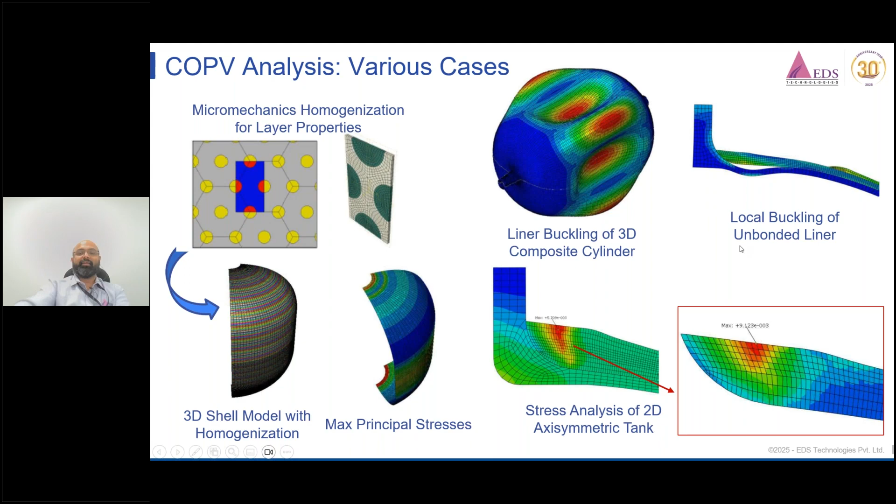These properties will then be applied to create the homogenized model for this composite pressure vessel, and we can perform various analysis. On the bottom of your screen we can see some stress analysis results generated with the help of this solution. Also some of the buckling cases for the composite liners, and some unbonding of the liner with other layers, can also be performed with the help of Abaqus.

Now coming to how we can model the interlaminar debonding or delamination with the help of VCCT, that is virtual crack closure technique. We have defined the debonding criteria between these two lamina, and then it is tested in the mode 1 opening analysis, and this is how the interlaminar crack or interlaminar damage will evolve and ultimately result in the separation of the bonds.

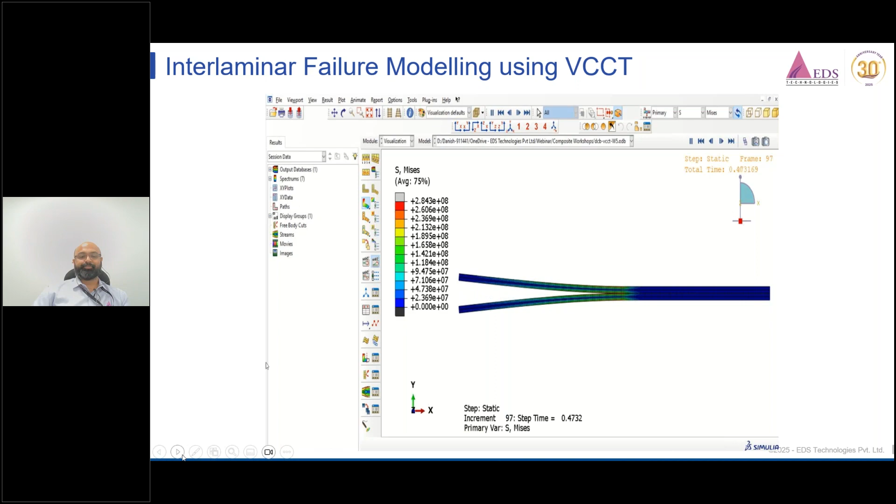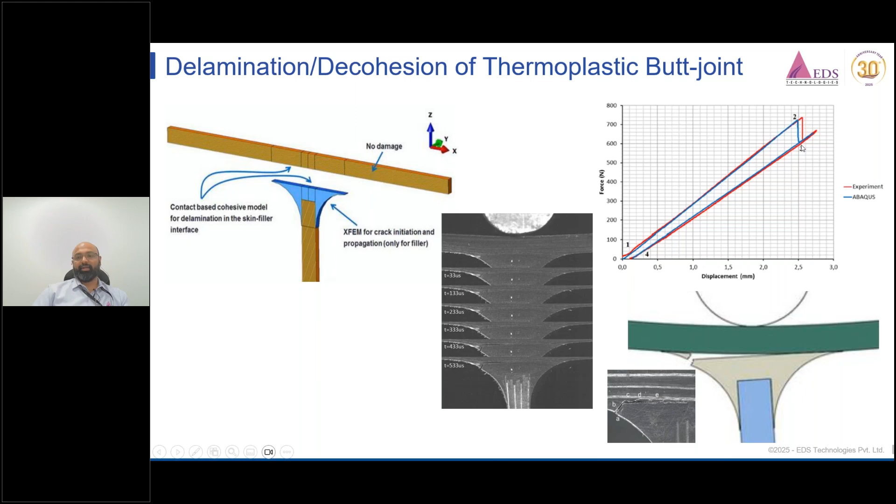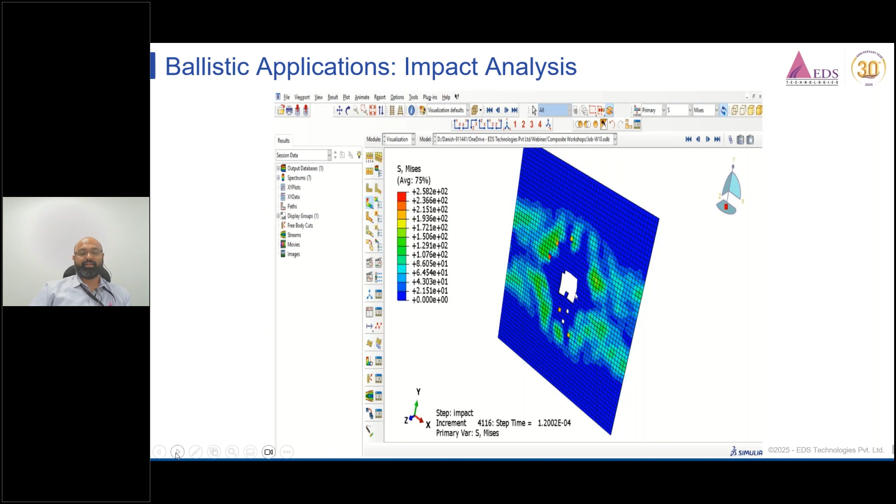Also, we have some cases where we can model the ballistic impact or the dynamical loading, how it will tear away the composite structure. So this is how we have defined the composite plate, and a small impactor is impacting on the structure, and we have used the element deletion feature to showcase how the impactor creates a crater in the structure and ultimately results in failure.

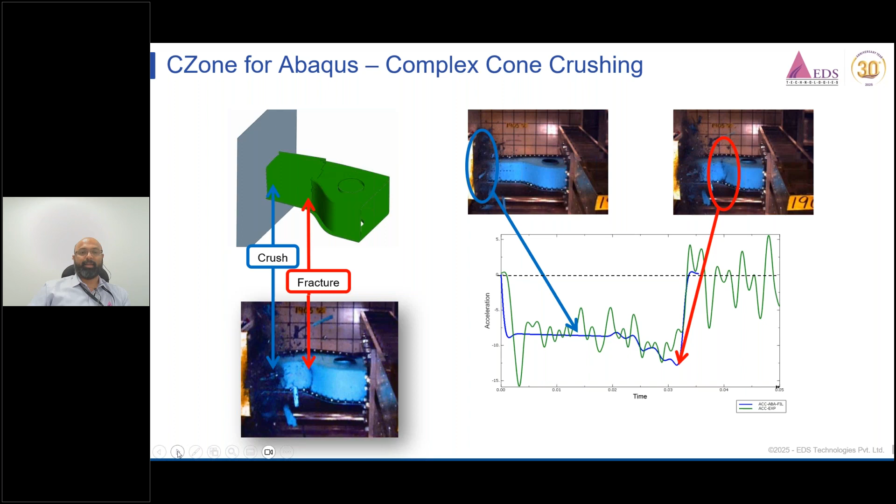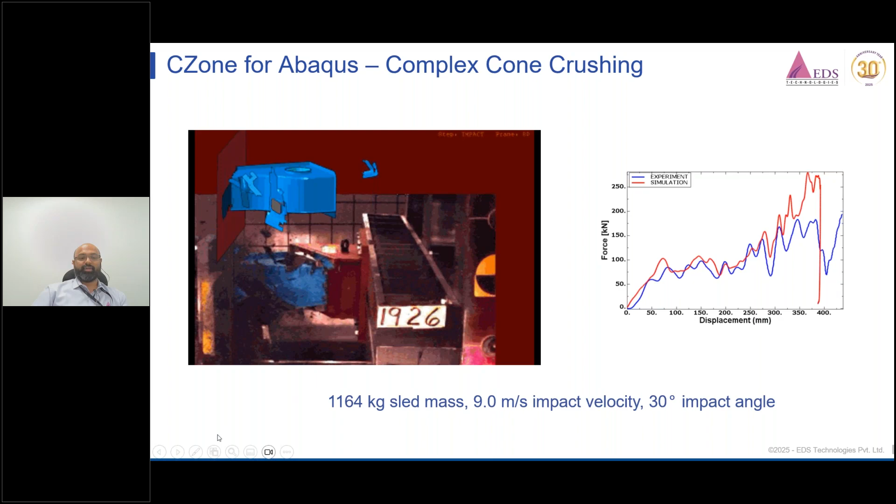Now coming to the CZone analysis, that is the crushing zone. We have seen earlier how we can use this CZone capability to capture complex crushing phenomena. This shows how almost 1100 kg of mass is impacted at 9 meters per second velocity, and the bottom one is the actual experimental test, and the top one is from the simulation results. The results are matching very accurately.